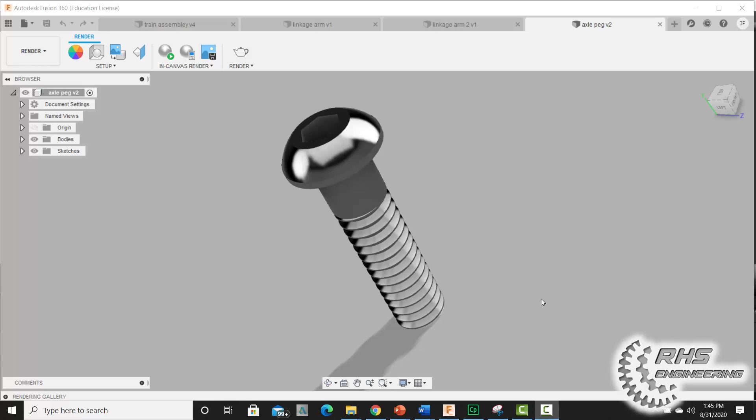Come on up here and we're going to do a file, new design. To get us started, let's go ahead and create a sketch on the XY plane. I'm going to zoom in a bit here and grab my 2-point rectangle tool, and for this bolt we're going to use the center revolve tool later.

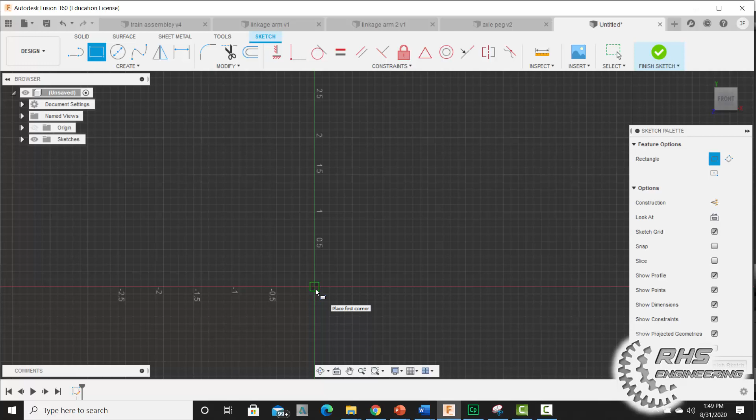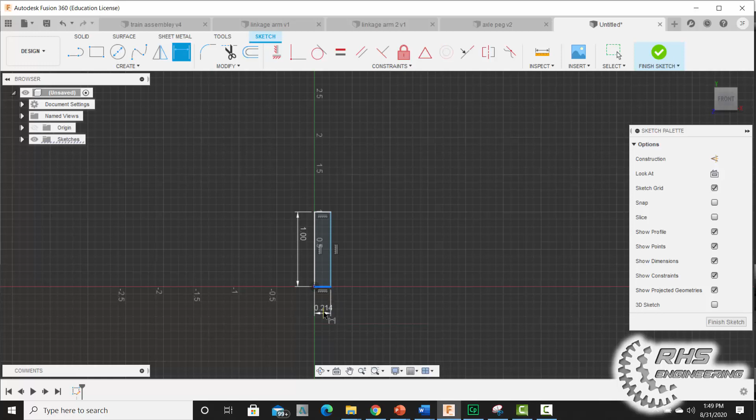So I'm going to draw half the profile of it, and this square will represent the portion of the bolt that's roughly cut in half. It's approximately 1 inch in height, so we'll give it 1 inch, and the diameter of the bolt is 1/4 inch. But remember, since we're using center revolve, all diameters need to be radiuses. So that radius should be 0.25 divided by 2, or 0.125. Enter. Okay, I'm going to zoom in a bit.

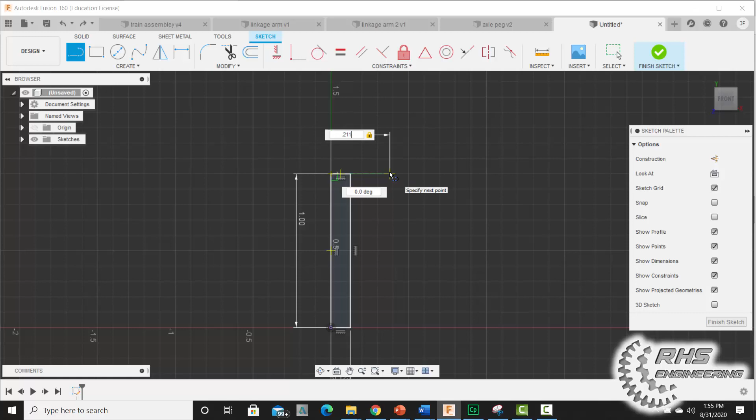Now we're going to grab our line tool again. And once again, the assignment gives us diameters, we want radiuses, so we need to divide them by 2. So this distance right here is 0.422 divided by 2, so we're going to make that distance 0.211. Now I'm going to zoom in here because we need to make a really small line, and that distance needs to be 0.031. Enter.

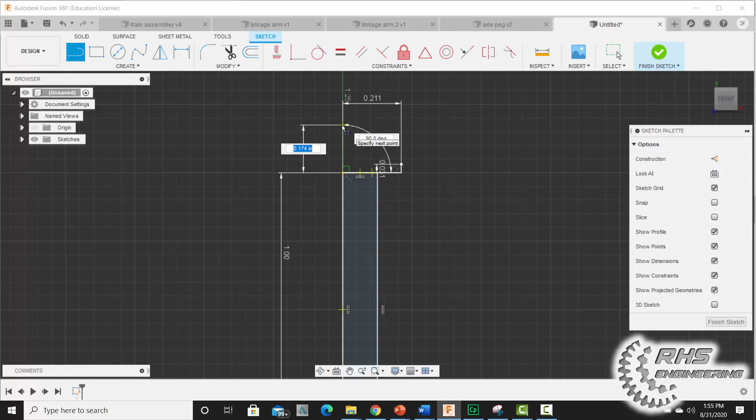Okay, I'm going to draw a line on the other side over here, right here, and that distance will be 0.125. Enter. And then one more line coming out again, and that distance should also be 0.125.

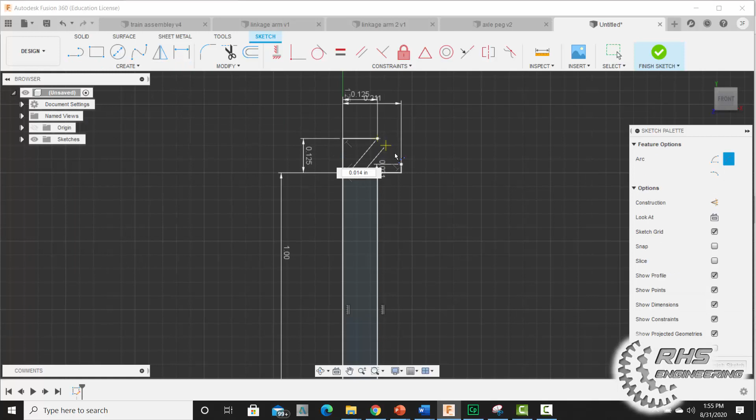Enter. Okay, now we're going to grab a 3-point arc. Just come down to your arc, grab the 3-point arc, and we're going to connect these two dots here, making something that looks like that. We're going to dimension the radius of this, and the assignment says it should be 0.236.

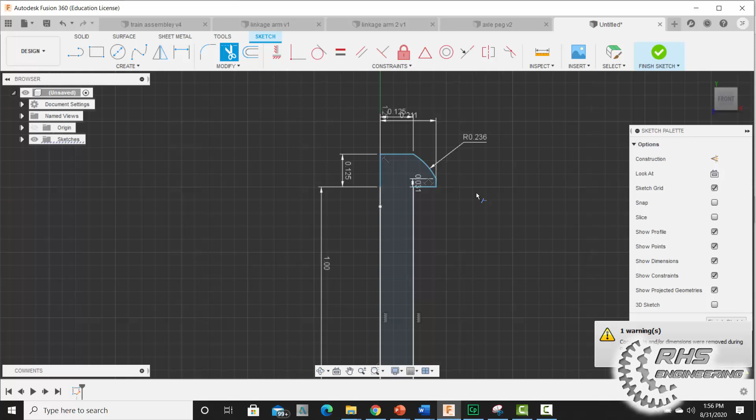Now we're going to trim this line and that line, and here's our profile. It's like our bolt if we could imagine slicing through it, right? Now let's go ahead and finish our sketch, and go to center revolve. The profile is selected, we just need to click on the axis now and hit OK.

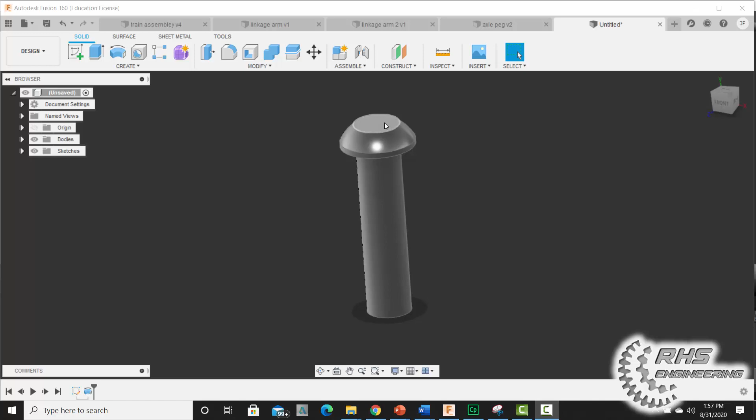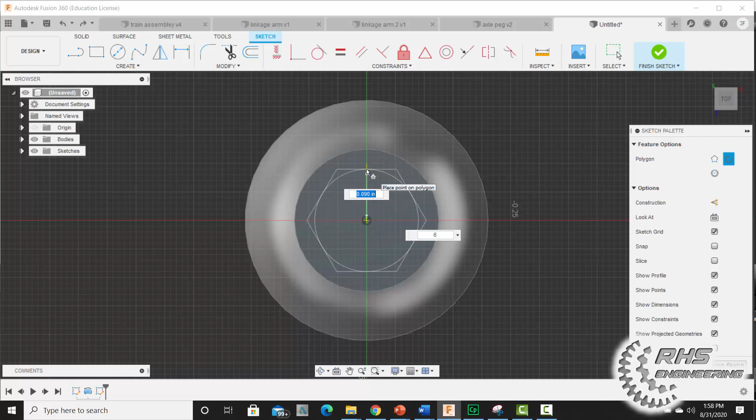All right, now let's go ahead and model the hexagonal feature at the top so we can insert our hex tool key. We're going to start a sketch here, zoom in again, and come to create and grab our polygon drawing tool, selecting circumscribed polygon. We're going to come right here to the center and drag out a hexagon roughly this size.

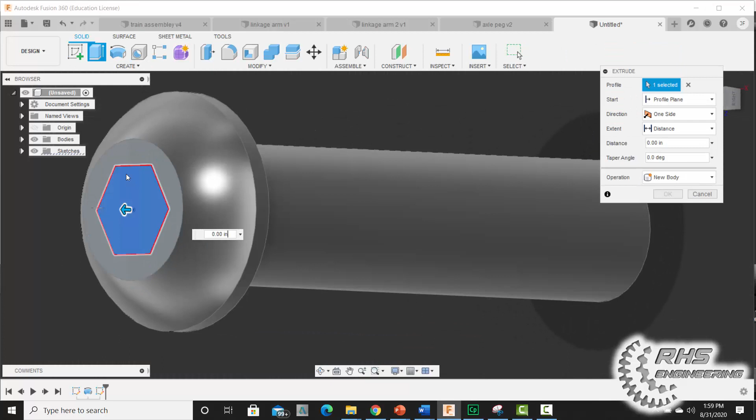We're going to dimension it to be 5 divided by 32. Enter. Then finish our sketch, extrude it a distance of minus 0.111 inches, and make sure it says cut, and hit OK.

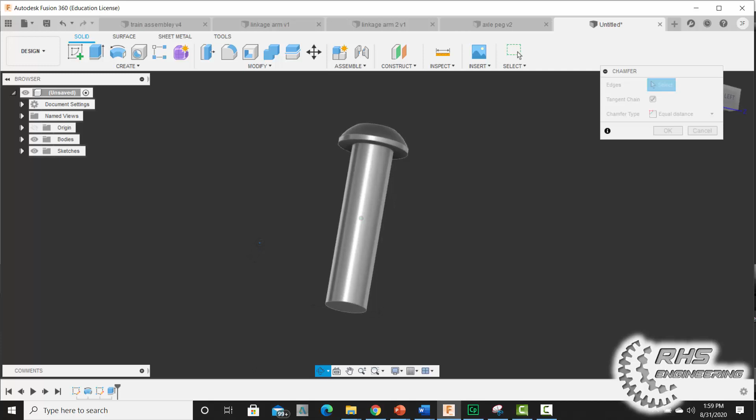All right, the bolt does have a chamfer on the tip of it of 0.03, so let's go ahead and do that. Come up here to modify, select chamfer, click right there, type in 0.03, and hit OK.

All right, so the last thing we want to do is add some threads to this guy. Let's come to create and come down to our thread feature. Right over here, we're going to select ANSI Unified Screw Threads, and we're going to size 0.25 inches. Right here, and we select quarter 20 UNC.

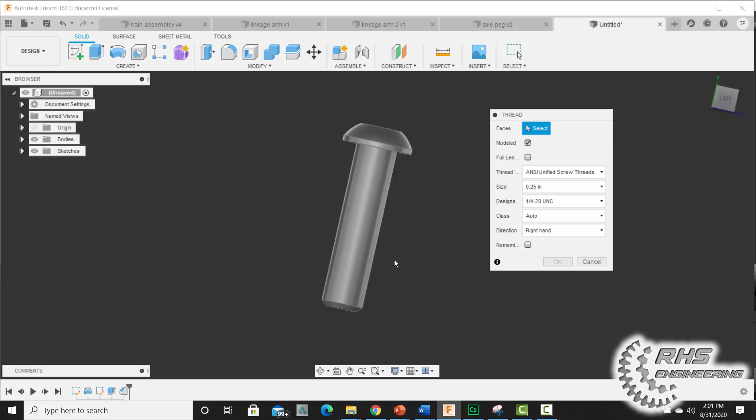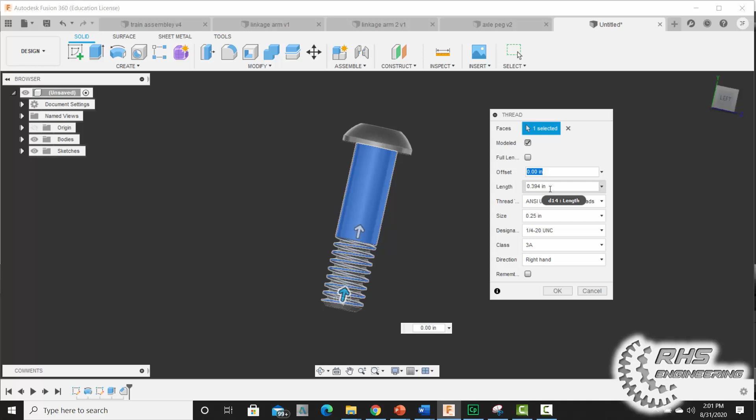And go ahead and select model. We're going to uncheck full length now. We click right there, and we want the offset to be 0.25 so it doesn't go the whole way up. Let's come back down here. Okay, so offset, I'm sorry, should be 0, and the length should be 0.75. There we go. Go ahead now and hit OK, and there is our bolt.

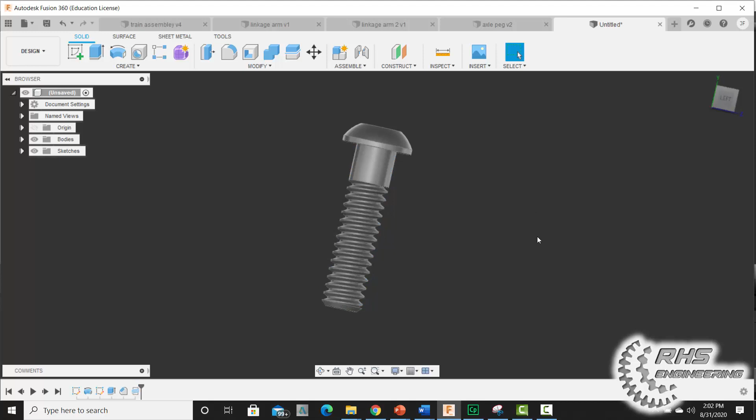When you hit model, it's important to realize that if you were to 3D print this, it's going to actually make the threads. If you didn't select model, it's not going to actually make the threads if you go to 3D print it. So just to show you guys real quick, edit feature, when you select model, notice what happens when I uncheck it. They're not really there per se, it just gives it the appearance that they are. So I'm going to go back and select modeled here, hit OK, and that's the last thing we need to do today for this particular design.

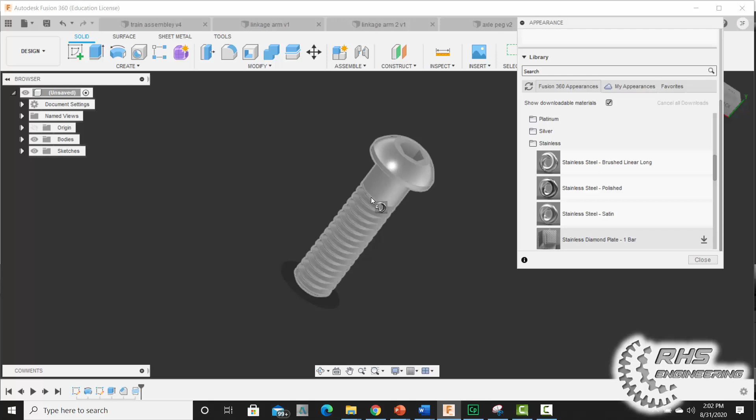We also want to always give it an appearance. For this particular bolt, we're just going to give it stainless steel. So let's go to metal and find stainless steel, and we'll give it a stainless steel polished look here. Okay, go ahead and hit close.